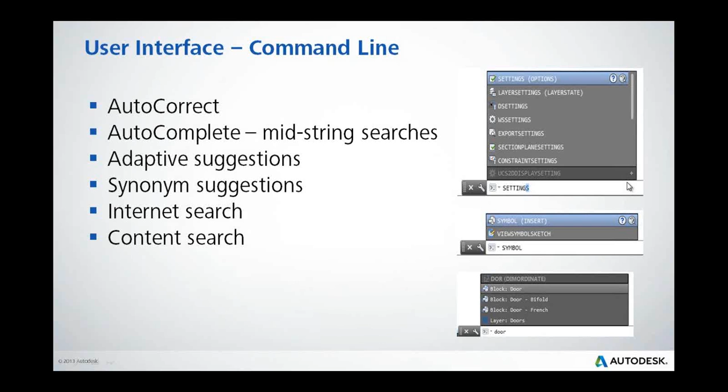And there's one more page here, because there are so many new features inside of the command line. Let's take a look at a couple more.

You have complete control over how this is set up. So if you don't like some of these new additions, turn them off—it's not a problem. You can set it up to work exactly the way you want to work. As I mentioned earlier, you can control that synonym list and add or subtract any synonyms, or modify them. You can also modify the autocorrect capability. It's so great that AutoCAD is so customizable. I love that—you can set it up to work the way you like to work.

All right, enough PowerPoint. Let's dive into AutoCAD 2014.

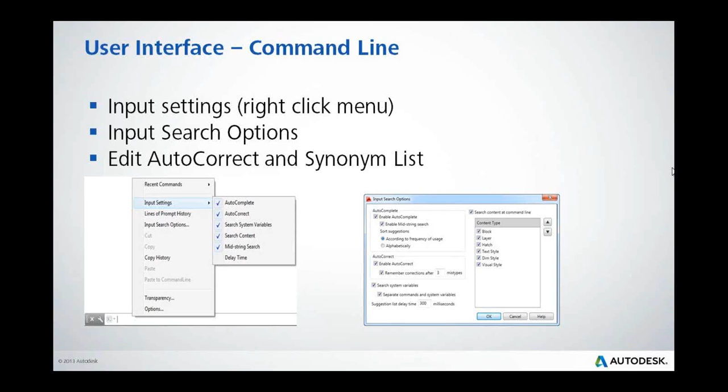All right, so here we are inside of AutoCAD 2014. For those of you who haven't upgraded yet, this is what it looks like—not a huge difference from 2013. A couple of changes you're going to see. We're going to talk about these tabs here, for example. We'll get to those later.

Right now we're focusing, of course, on the command line, right? So let's take a look at some of those things that I talked about.

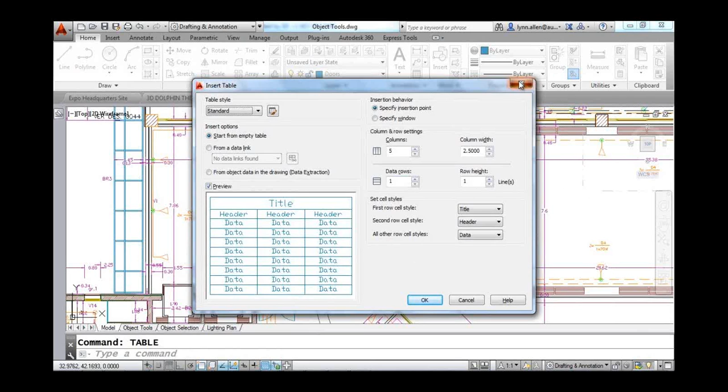I'm going to come over here and say—oh, spelled line wrong—and look, it was smart enough to execute the line command. Or how about if I spelled table wrong? It's smart enough to execute the table command spelled correctly, right? Nice, because let's face it, us CAD operators are not known for our amazing abilities to spell, correct?

So, nice new feature. I also mentioned that AutoCAD supports mid-string search now as far as the command line is concerned. Let me show you what I'm talking about. I'm going to type in settings, and you'll see that it executes all of these different system variables that have to do with settings, right? Quite a few. So settings is at the end of most of those, but it's able to find them for me.

This is great because I can never remember which settings I'm after. It has the word settings in it, but I don't know—is it D-settings? Is it B-settings? So that's also quite nice. And even if it was in the middle of a word, it would find it as well.

I also mentioned that AutoCAD 2014 can search for content. For example, if I type in the word door, you'll see that it tried to figure out if I was spelling something not quite right—that would be that option there. But you'll also see that it allows me to insert a block of a door.

Or check this out—I can click on layer, and it actually sets it to be the current layer. Love that, that's pretty cool. This is for those of you who are so into your command line that you really like to type. You know who you are.

All right, another new feature for the command line is the ability to search for synonyms. For example, if I type in symbol, you'll see that it's happy to execute the insert command, because in MicroStation, the symbol command is equivalent to our insert command. Or if I type in zip, because a lot of us think of zipping up files, you'll see that it will execute the eTransmit command for you.

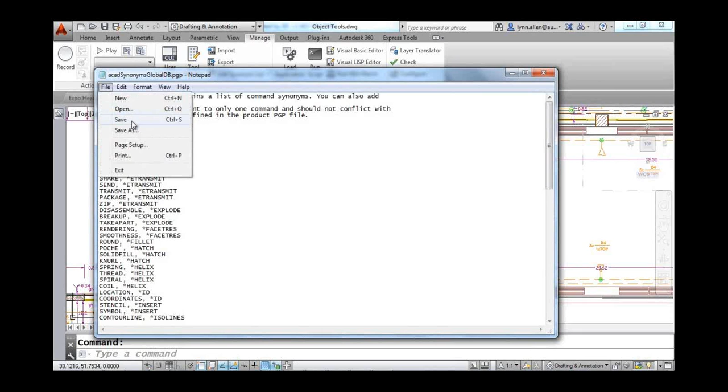So there is no save on here. It's kind of unusual, there's no save. This is just Notepad. You can do file and save, or if you go to exit, it's actually going to give you the same option. So save, it's up to you, however you want to do it.

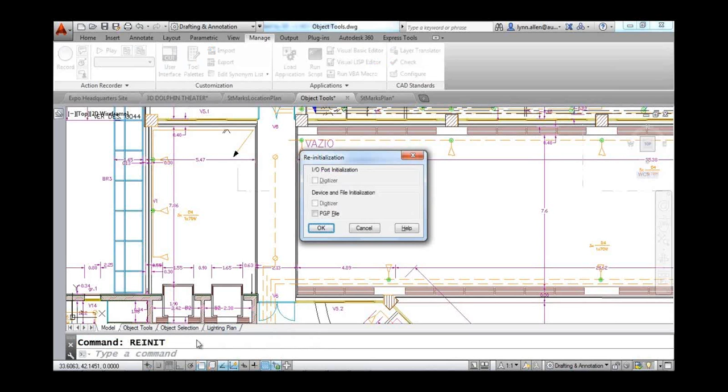Now, type in Dunkin' right now. It's going to have no idea what I'm talking about because the PGP file doesn't take effect until you leave AutoCAD and come back in, which I'm totally not going to do. That'll take too much time. There is a sneaky command that allows you to get around that called reinit. I'm going to execute the reinit command. That's for reinitialize. You don't need to remember this. In most cases, you can just leave AutoCAD and come back, like I said.

You'll see there's an option right here for the PGP file. So I'm going to go ahead and click on that and say OK. Now, if I type in Dunkin', D-U-N-K-I-N, it executes the donut command. Yay! All right, so what else can I do? Set that up anywhere you want. Have fun with your coworkers, right? You can completely change all the commands inside of AutoCAD.

Kind of fun though. Also, just to show you a couple of other things, if you go to settings, you'll see that you have the ability to control any of these. If you don't like them, you can turn them off. A simple click will turn them off. I can't stand that mid-string search, by all means you can turn it off. There is also a dialog box, input search options. It has all kinds of ways that you can customize the way this works for your command line.

So when I did a content type, remember I typed in the word door, it found a block called door that had the word door in it, and it found a layer that had the word door in it. Could have also found a hatch pattern. Why you would have a door hatch pattern, I can't imagine. But you'll see these are all the things it searches for: hatches, text styles, dimension styles, and visual styles. Maybe you want to control this—you only want it to search for blocks and layers. You can certainly turn this off, it's completely up to you. You'll see once again you can turn off that mid-string search. There are a variety of things that you could do, right? Set this up exactly the way you want it to work.

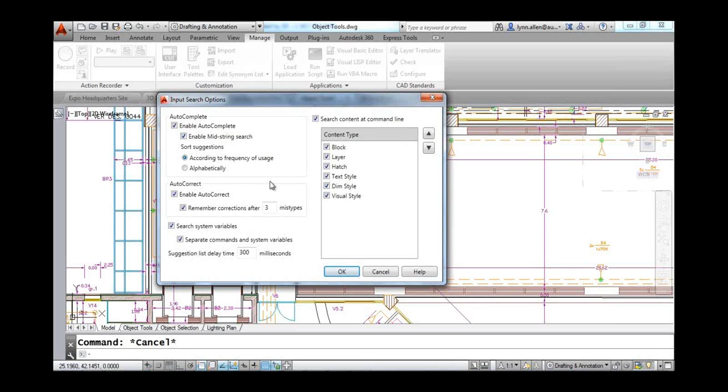Great, one last thing that I haven't shown you yet. If I type in set, you will see there's all kinds of commands that have set in them. And then you'll see when you get down there, this is actually a system variable. There are all kinds of system variables that have the word set in them. Rather than show them all to you and overwhelm you and scare you, there's a plus at the end. You can click on that plus, and it will show you all of the system variables that have the word set somewhere in it. So if you don't see a system variable that isn't showing up, it's probably because you need to expand the category. And that's just AutoCAD's way of not overwhelming you with too many options.

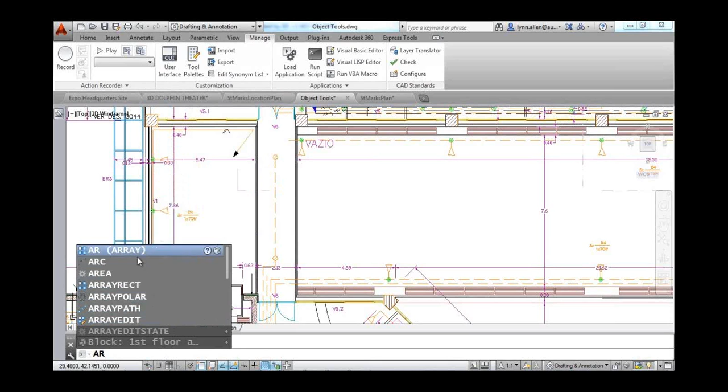All right, so one last thing. If I type in AR, you will see that I get a list with array at the top, arc, and area. So this list is controlled by your frequency. The more I use the arc command, the more likely it's going to move to the top of the list. If I use the area command all the time, it might move to the top of the list. So my listing is probably different than your listing. Could be, maybe it's not, maybe it's if we use them in the exact same order. Just realize that as you continue to use AutoCAD, that command line is going to get smarter and smarter, and it's going to allow you to get to your commands faster, which I love.

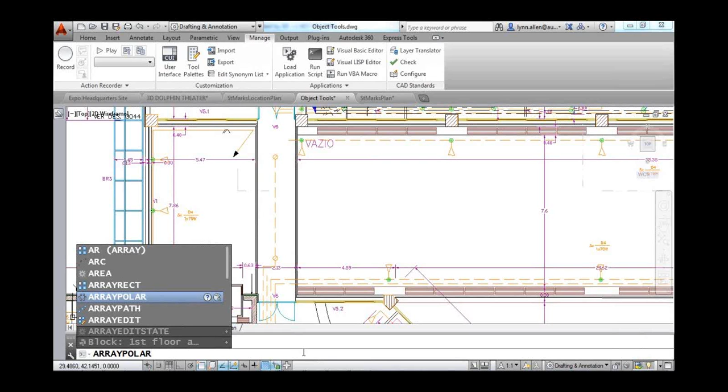All right, so let's go back over to the PowerPoint now that we are command line experts.

Let's take a look at one of my favorite new features inside of AutoCAD 2014, just because it's so logical. How has this not been in here before, right? Now we finally have file tabs of all of your open drawings right there inside of the drawing editor.

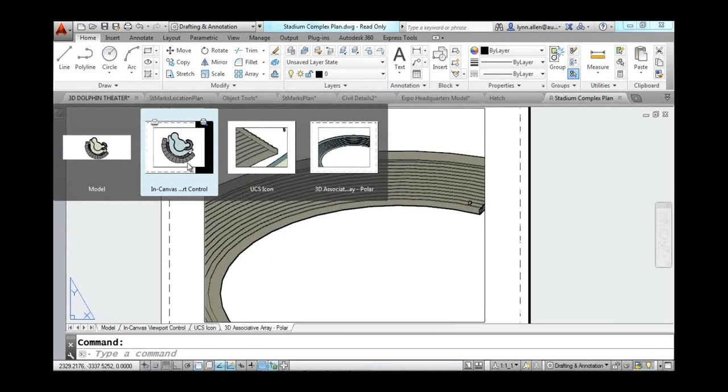Let's take a look at how these file tabs work. Back over to AutoCAD, if you take a look at the drawing editor, you'll see that all of the open drawings are now displayed in file tab format. I love this. Notice as I move my cursor over the open drawing files, it shows you the layout tabs that exist inside that particular drawing file. If I move my cursor over a layout tab, it will automatically change the background to give you the appropriate layout tab preview.

It doesn't actually move me to it at that point, I'd have to click on it, but it gives me a nice preview. You'll also see inside each of the layout tabs you have the option to do a plot or a publish. Love that, without having to actually go to that layout tab.

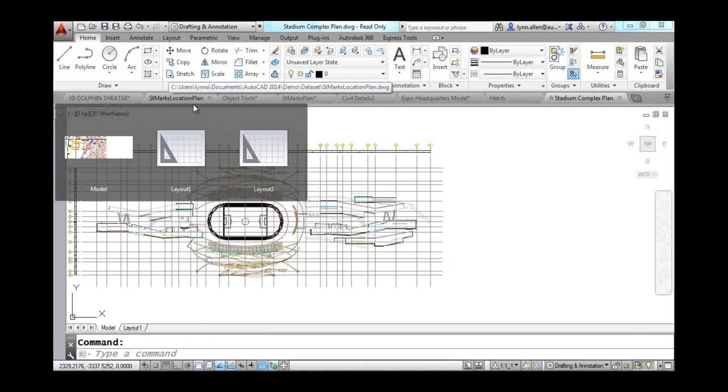As I move my cursor across here, it shows you the different open drawing files and the layout tabs in each one of them. Very powerful. Now, if you get so many drawing files open that they don't all fit, don't worry. You go to the very end down here, you'll see a couple of arrows. Click on there and that will also show you all of the open drawing files, so you can easily get to the one you're after.

Some of these drawing files you'll notice have a lock on here, you can see the lock down here too. That means that file is read-only, so you can't save it, make changes and save it. Some of these you'll see have asterisks after them, meaning they've been edited and need to be saved. Just some more information for you.

I actually love this right-click option because there are some very cool things if you right-click on any of the tabs. These are basic, new, open, save, blah blah blah, but I really like this 'close all except this tab'. Super handy. You don't even have to be in the drawing file, you can just right-click on the drawing file you want to leave open, and everything else will be closed down. Pretty cool, very fast and efficient.

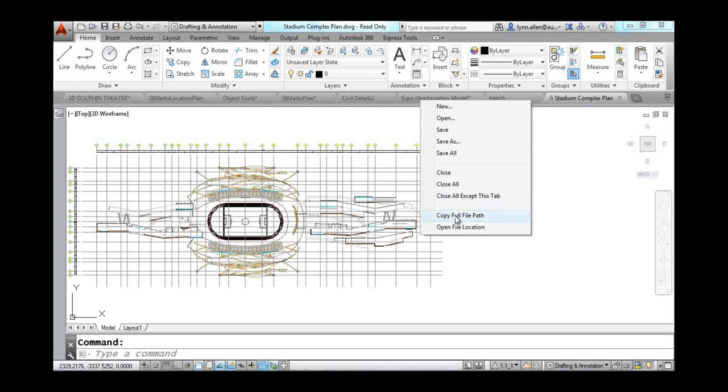Copy full file path. Let's say you wanted to send a link to this drawing file to somebody else so they could grab it from a directory somewhere. You could copy that to the clipboard. And open file location, I'm totally going to click on that just because I'm always wondering what directory a drawing file is in, since I'm not organized. I hope you are more organized than me. I actually love this option because I can quickly go see what directory that drawing file was in. It's better than going to properties or doing a save as. We all have our different tricks of figuring that out, but I do like that feature.

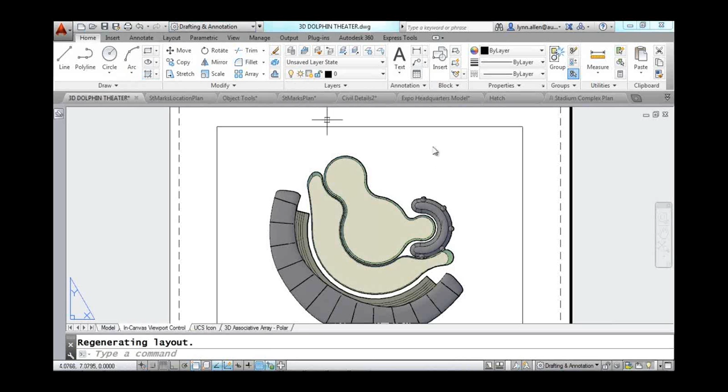All right, let's go back to where we were inside of AutoCAD. One more thing: let's say you want to create a new drawing file. You can come up here and click New, or go into the application and click New, but you can also click on this little plus right here, and this will create a new drawing file for you. If you have a default template set, it's just going to use that and run with it—it's actually executing the QNew command. But if you don't have a default template file set, it will ask you to select a template file before it creates a new one.

All right, so let's say for some reason unknown to man, you don't like these file tabs.

Why? I don't know, because I love them. You can turn them off.

Simply go to View, and you'll see an option there for File tabs, and they go away. Oh, sadness, and put it back. But just so you know, we try to make it so that if there's a new feature you don't like, you don't have to be forced to use it in most cases. Not all cases, but in most cases. All right, those are File tabs. They are awesome, they rock, and you should try them.

Back over to our PowerPoint. So I think these next few features I'm not going to show you. I think you guys are smart, you're going to completely understand what I'm talking about.

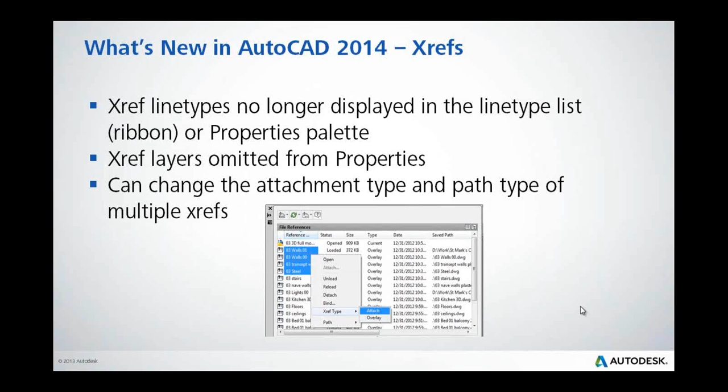All right, so let's move on. I don't know how many of you work with reality capture or if any of you work with point clouds and scanners, but you will find that all of the Autodesk products, I mean like AutoCAD, Revit, and Inventor, all come with this great new program called Recap.

It is focused around reality capture, and it is a totally separate application. It comes free along with the suite, so you're going to get it whether you like it or not. But it's a very, very powerful application.

If you're familiar with point clouds at all, you know that point clouds are big, slow, cumbersome files. You want to slow down your AutoCAD, put a point cloud in it. You get paid by the hour, put lots of point clouds in it. So it really slows down your ability to draw and edit inside of AutoCAD. So Recap gets there first. You're going to use Recap to put all of your point clouds in it, and it's going to speed them all up, make them lightning fast, so that when you take them into AutoCAD or Revit, for example, those point clouds are going to be fast and mighty.

All right, it's a really interesting program. Once again, it comes free of charge. Definitely suggest that you take advantage of it if you are into reality capture. And you don't have to have a gazillion-dollar scanner to use Recap. You can actually just use your phone, or if you want to get fancy, you can use a really nice camera. But I'll show you some examples of this, all right?

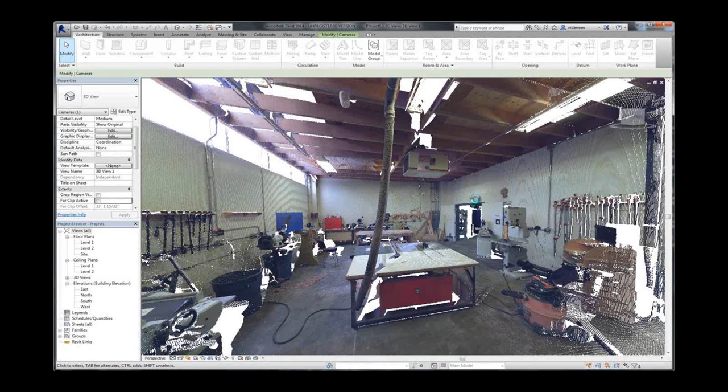And this is a point cloud file. It looks almost like the real thing, doesn't it? I'm going to go ahead and click on here. We'll see how good the experience is for you. I'm doing a video inside of a video, but you can see this is a pretty impressive point cloud. These point clouds were run through Recap to make them faster, and they were brought, in this case, into Revit, but you could also bring them into AutoCAD.

So just to kind of recap there, with CAD we usually start with a blank sheet of paper, right, which is not realistic. Everything that we work with, for the most part, has an existing environment. So reality capture allows you to take it to the next level and design in context, which is just so much more efficient.

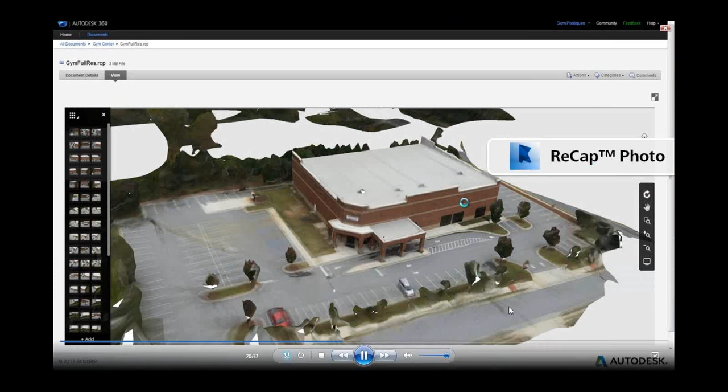So here's an example of ReCap Photo, which is another application that you have access to free of charge. Let me go ahead and click on here. ReCap Photo does exactly that. It works with just a regular camera. Technically, it could be your cell phone.

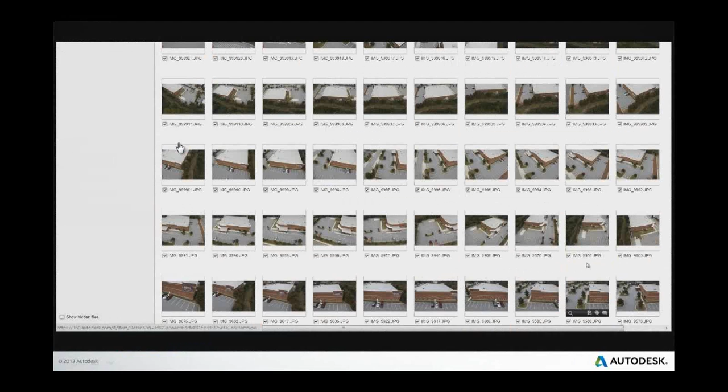You have a little drone here or there that flew over the building. You probably don't have one of those laying around, but I bet you wish you did. You want to fly over the building so you get the roof, right? So you could also rent a helicopter, stand on a really tall mountain. But you do usually want to try to get the roof if you can. You don't have to. So those were all the pictures that were taken from the camera.

And then ReCap Photo is going to put them all together and create a 3D model out of it. Look at that, that's amazing. Once again, extremely realistic. You can tell, look at that. It looks like you're right there with the sign.

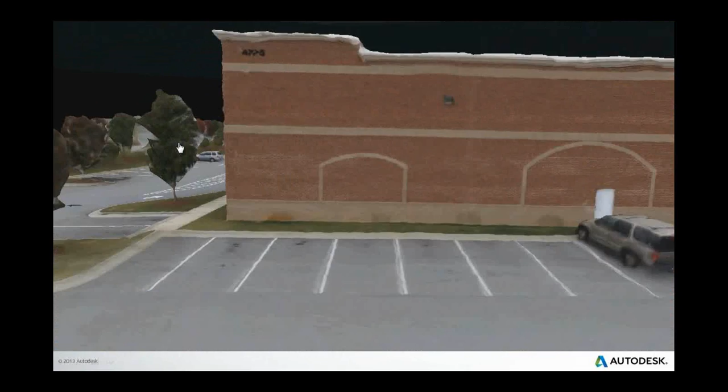Now the goal is to add in a second floor using the existing building, which makes complete sense. This is incredibly accurate. Point clouds are very precise. They're basically just XYZ coordinates stored together in a big cloud, kind of like a bunch of mosquitoes.

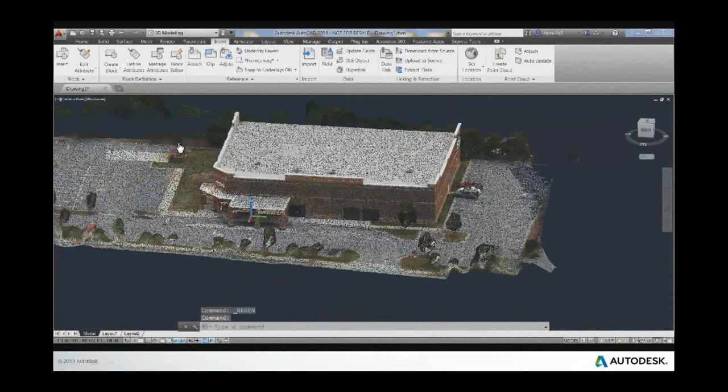So we're going to go into AutoCAD and trace right on top of the point cloud. Once again, in 2013 or before, this would have been very slow and very cumbersome. It's very easy now. Speedy.

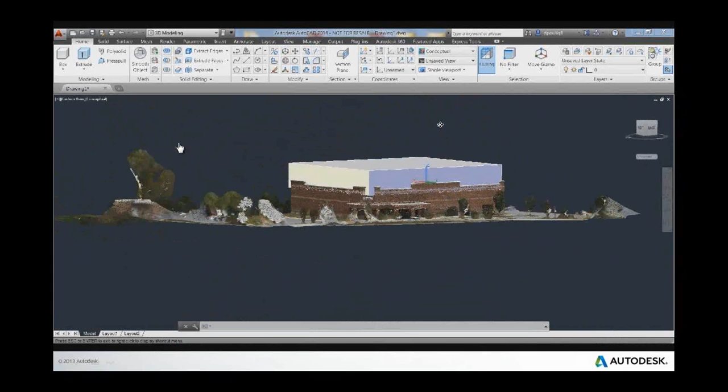You can turn off this point cloud environment at any time if it gets in your way, once you have the points that you need. There you go. Just that simple, easy peasy. Definitely give it a try if you have it—might as well, right?

Now we're going to move on to Geographic Location. Geographic Location has been in AutoCAD for a while, but it's been greatly improved inside AutoCAD 2014, including support for Bing Maps, which is fantastic.

This gives you the Geographic Location feature, which for those who haven't worked with it before, gives you the opportunity to work with your design in context of the actual location. You can pull up an aerial view or a road view and include it in your design. Very, very helpful. It also comes in handy for rendering because you can set an actual sun angle based on where you are anywhere on planet Earth.

It's very, very helpful. And for those of you who work with AutoCAD Map 3D, you'll see it has the same coordinate system library, with many options when it comes to selecting the proper coordinate system. Okay, let's see it in action.

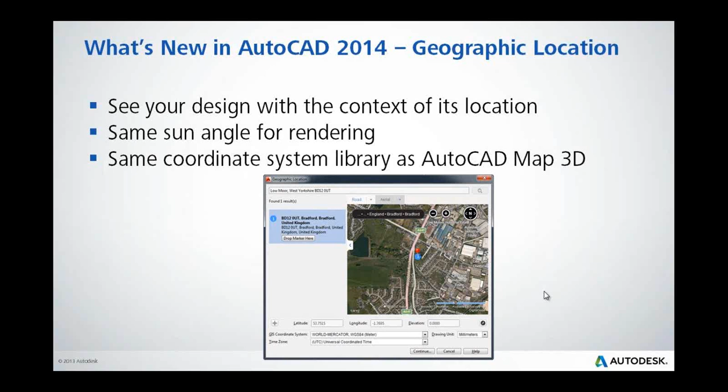So here we are inside AutoCAD 2014, and this is an interesting floor plan. A colleague of ours purchased a church in the UK and wants to live in it. He designed this floor plan, and what we'd like to do is place it in the actual location on the map to see if the design makes sense and give it better perspective. It'd be pretty awesome to live in a nice big church, right?

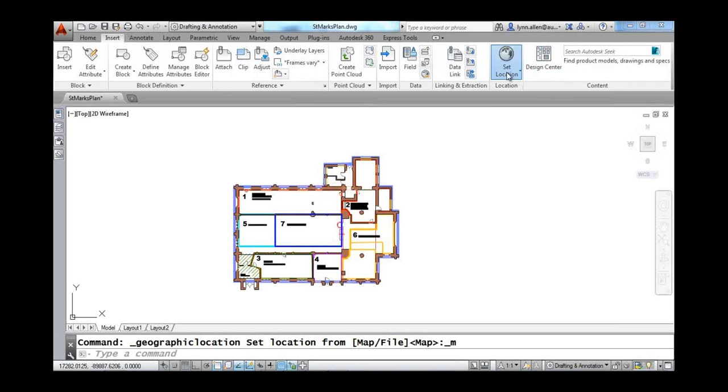So we're going to go to the Insert tab on the ribbon and go to Set Location, and I'm going to grab it from a map, from Live Maps, which is courtesy of Bing. Now, let me give you a heads up: if you are not logged into your Autodesk 360 account, this will not happen. Make sure you log in first.

So I'm going to type in an address—let's start with a more generic one. Let's do Bradford, UK. You'll see it comes up with 3 different locations for Bradford. I can click down this list and it will show me the 3 different locations. You can also see I happen to have it set to automatic. If you wanted, you could view it from a bird's eye view, or switch it to plain old aerial photographs—whatever you want.

Now, we're not actually going to Bradford—that's not where the church is. The church is actually in Low Moor, UK, and it has only one address, which is why that wasn't as exciting. I wanted to show you a different one first. You can see right there, if that's the right location, you can say drop the marker here.

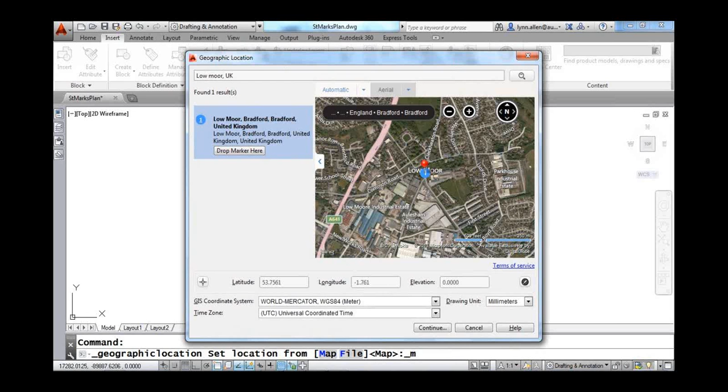So Low Moor is kind of generic. In reality, the church is right down here, so my goal is to move that marker so it's actually closer to the church. Let's collapse that, and I'm going to grab that pin and move it down here. Let's see how good a shot I am today.

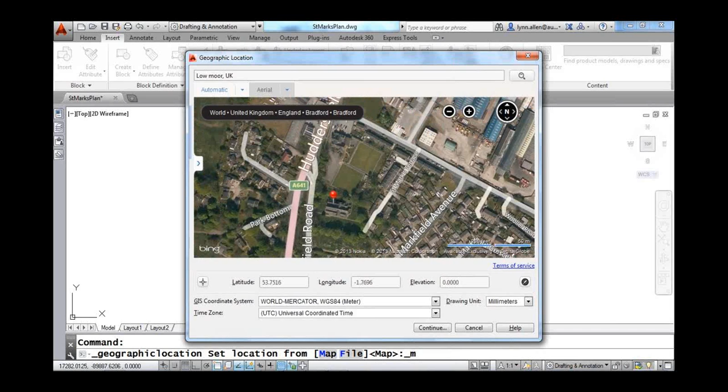I'm going to zoom in because I'm not convinced. One more—zoom in a little bit more. I want to get right on the corner of that building. So I'm going to grab that pin and put it right on the corner. That looks pretty good, because we need to line it up in our drawing file.

You don't want to just randomly drop a pin—you want it to be in the right location. That makes sense, right? So taking a look at this, you'll see the latitude and longitude of where that pin is.

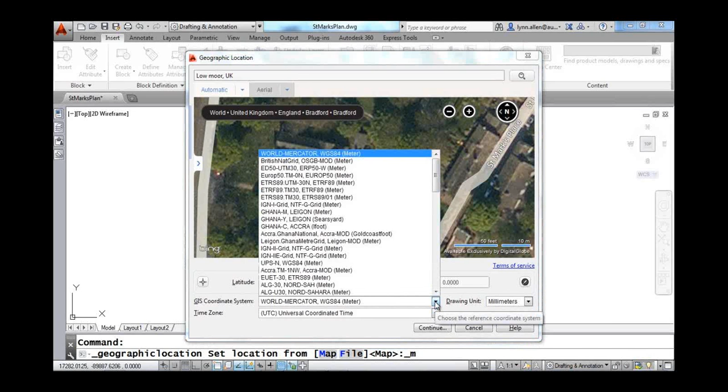You can do that manually as well if you prefer. I want you to also notice that the coordinate system is World Mercator. That's a very generic coordinate system and probably not going to do the job for you. As soon as you drop that pin, it's going to give you coordinate systems that are relative to the area that you're in, so you're going to pick one that's better.

In this case, I'm going to switch over to the British Nat Grid. That's a much better coordinate system for what we're doing to make sure that we get the best results. Now, that automatically scales the drawing based on that coordinate system. You'll also see that the drawing units are optional as well, but I like to leave it the way it was set up to begin with, though you can make changes to it if you want to.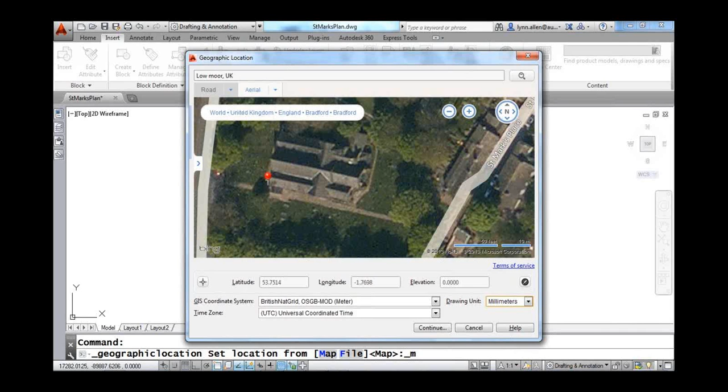So what else can I do? I can switch over to road if I want to get some idea what this looks like from a road standpoint. Completely up to you. Or, you know what else we can do? We can do bird's eye view, right? It's another option, gives you a little clearer picture of that church. I like to switch it to automatic so that if it's zoomed out, it's going to give you the road map, and if you're zoomed in, you're going to get an actual aerial photograph.

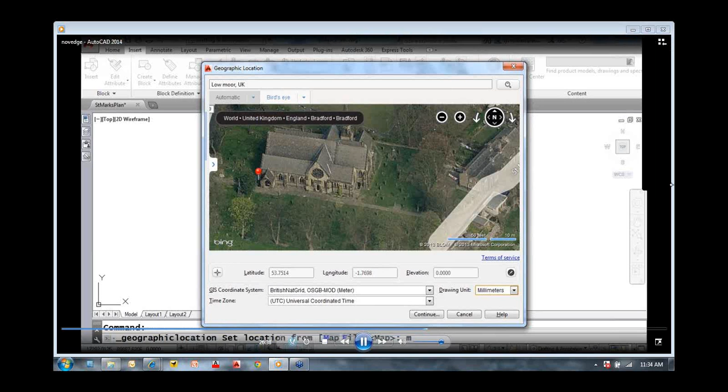So I think that's it. We're inside of the geographic location dialog box. Let's go ahead and hit continue. And now, you saw where I dropped the pin in the map. We need to click on here where we want that pin to match up with. So I'm going to grab the lower left-hand corner, and I'm going to grab the upper left-hand corner for north. It wants to know where is your north, right?

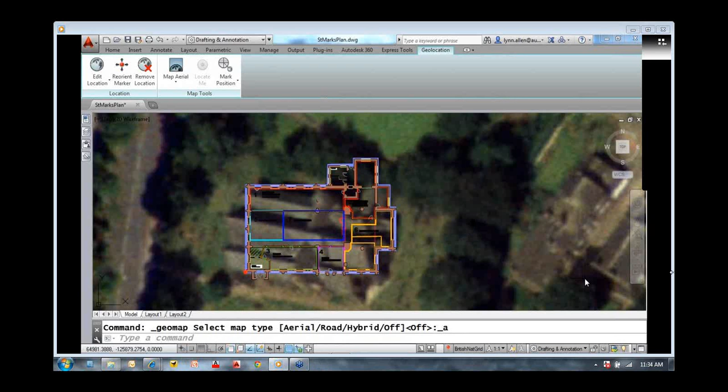Now, I currently have maps off. I want you to see it added a geolocation tab on the ribbon. I'm going to turn those maps on. Let's see how we did. Well, we're kind of close. It's not quite the right angle. It looks like I could use a little reorientation. But before I do that, let's come down over here and show you what Map Road looks like.

You can even do a hybrid, right? So let's reorient that marker. Let's get it a little bit better. We want the same point, but I want to pull it off just a little bit so I can angle it just a little bit more. Let's turn that map back on. Let's see how we did. Yeah, it's close. You can see I'm still a little bit off. I'd have to do a little bit more work to get that correct, but I think you get the general idea.

So there are a variety of things you can do. You can edit the location. That takes you back into the map, reorient the marker. I probably would need to go back into the map to easily fix this, get it just right. You saw the different options that I had up here for the way I wanted it to display. The map gets in your way, just turn it off, no problem. And as well as that, you can change the marker position. So pretty cool technology, don't you think? That is geographic location. I want you to give it a try.

I happen to know the first thing that you're all going to do is you're going to key in your address. At least that's the first thing I did. So, all right, back over to the PowerPoint.

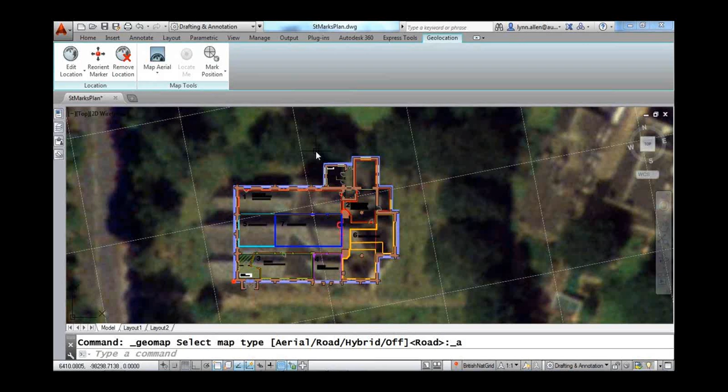The next set of commands has to do with improvements to what I refer to as everyday AutoCAD commands, those commands that we use all the time. And I love these improvements because if you can remove a click or a pick from something that I do all day long, well, that is a beautiful thing. Am I right? That is why I like these so much. Get rid of the tedium. There's quite a bit of tedium in AutoCAD, and we want as little of it as possible.

So I'm going to just talk about these. Once again, I'm not going to show them to you because these are commands you're familiar with. So the first one, very simple: we've all run into that situation where we wanted to draw an arc clockwise, and as you know, AutoCAD much prefers to draw arcs counterclockwise. So if you run into the situation where it's not going in the right direction, no problem.

Hold down the Control key, and you'll have the right arc that you want in no time at all. A simple change can make a big difference for those of you who draw a lot of arcs.

If you've ever tried to fillet a polyline with itself, you know that AutoCAD yells at you - you can't do that, warning, warning. So now you'll find that the fillet command is much more easy going, and it will allow you to fillet a polyline with itself.

For those of you who are really into sheet sets, you'll notice that by default, the Create Date field always reflected the template file, which is not what you want. The Create Date field should reflect the new drawing sheet that you've added, right? So just so you know, that's been changed as well.

For those of you who work with blocks with attributes, which is almost all of you, you know that by default, AutoCAD does not display a dialog box for the attributes. They show up on the command line - very archaic. So now, by default, the attribute dialog box will show up. That's the same as setting ATTDIA to 1. So that was a great improvement.

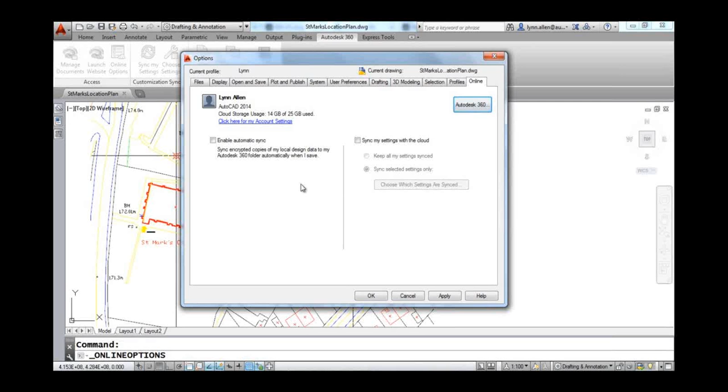I also mentioned that you have the ability to sync your settings to your Autodesk 360 account. I talked quite a bit about this last year. You can save your options, your customization files, your tool palettes, templates, etc. up into your Autodesk 360 account. That really comes in handy if you decide to use AutoCAD on a different system, so you can quickly set it up the way you like to work. Or let's say things go terribly badly and you have to reload AutoCAD. As long as you have your settings saved, you can pull them down and get back up and running in your nice, comfortable environment very quickly.

So here you can share a document. You can send an email to somebody and it will set up a link directly to your drawing file. You can collaborate now, which takes you to AutoCAD WS, which as of yesterday, Tuesday, is now called AutoCAD 360, and Design Feed, which is another new feature inside of AutoCAD 2014 that I mentioned earlier.

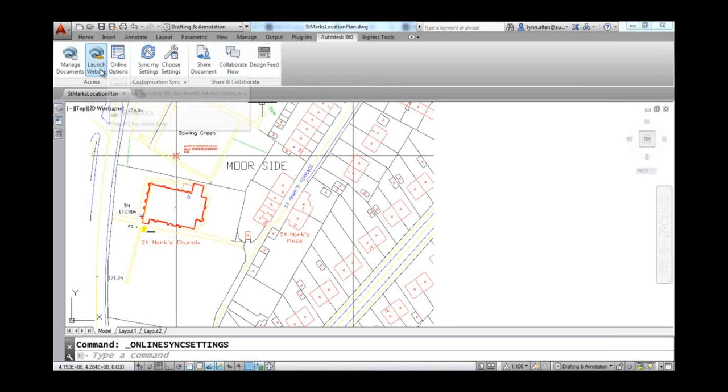All right, so let's launch the website. This is going to take me into my Autodesk 360 account. You can see what's been going on today. Looks like I was working with a couple different files today. I like to go to the Documents tab.

And here you'll see all the documents that I have loaded up on my Autodesk 360 account, and many of them are in folders. Most of them are DWG files, but they could be Revit files or Inventor files. It could be a grocery list. They could be PDF files. They could be anything that you want. It's your Autodesk 360 account, and you get to pick what you want to put into that account.

Now, in the lower left-hand corner, I always keep an eye on this. This shows you how much of your 25 gigabytes, if you're on subscription, or 3 gigabytes, that you have currently used. So keep an eye on that, and make sure you don't get too close to your allocated limit.

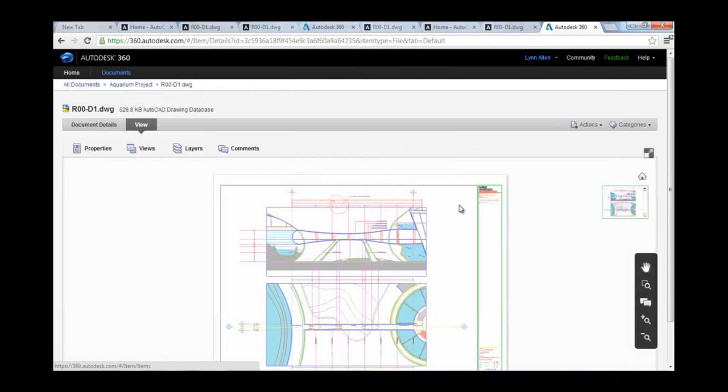So I'm going to go into a folder. Let's go into this one. You'll see I have two drawing files in this folder, and let's go into this file. So let me show you what you can do inside of your Autodesk 360 account. Here's my drawing file, and you'll see, of course, I can zoom and pan.

That's no big surprise. You can control layers. You can turn layers off. As I go through here, you should see some layers being turned off.

You can add comments in. You can see that I added a comment earlier: this is my updated file, have a nice day. I'm very friendly, but you could add, thank you, Novedge, for sponsoring this webcast. You'll see that that's another option on there.

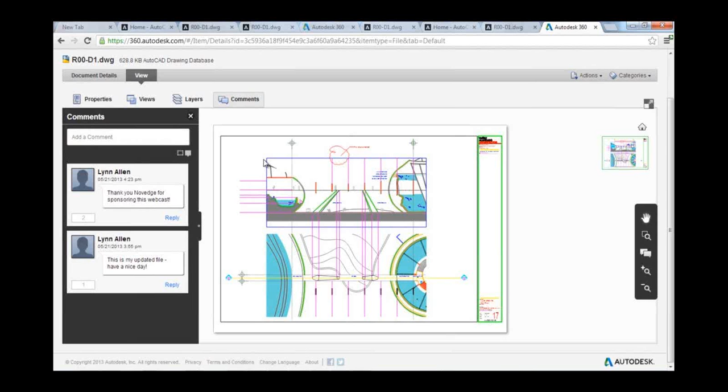You can't really edit inside of Autodesk 360. If you want to edit, you're going to need to go to AutoCAD 360, and that, as I mentioned, was just announced as the name change. And there you'll find that you can do some basic editing of any drawing file.

You'll see that you can share this drawing file with people. You can upload new versions. There's all kinds of things that you can do here inside of your Autodesk 360 account. Once again, if you want to edit, you're going to have to go to AutoCAD 360, also free, which is good.

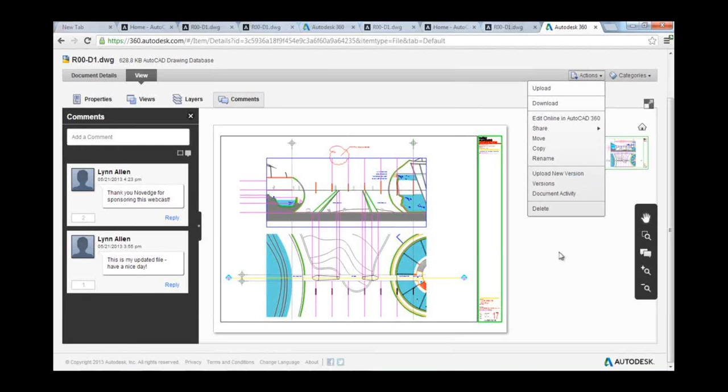Another new feature inside of AutoCAD 2014 is Design Feed. And Design Feed, as I mentioned before, allows you to post comments, questions, and suggestions for your drawings that you can then share online through Autodesk 360. It definitely allows you to take collaboration to the next level.

Let's take a look. I should mention that I'm going to be showing you Design Feed over a video, an existing video, because Design Feed requires two-way communication, which is really hard to do by yourself. So I'm going to be talking over a video. You'll see that Design Feed shows up on the left-hand side of the screen as a palette, along with all of the great tools that you have as part of Design Feed. I also showed you earlier that you turn on Design Feed from the Autodesk 360 ribbon tab.

Now, if you haven't already saved your drawing to Autodesk 360, it's going to let you know, because all of the tools will be grayed out. But once you've saved it, you can enter text to create a new post, and it will appear in the Design Feed whenever anybody views this drawing.

Your colleagues and anyone else with access to the drawing can view and respond to your posts when they open it. You can also tag specific people so they receive an email notification with a link to your drawing.

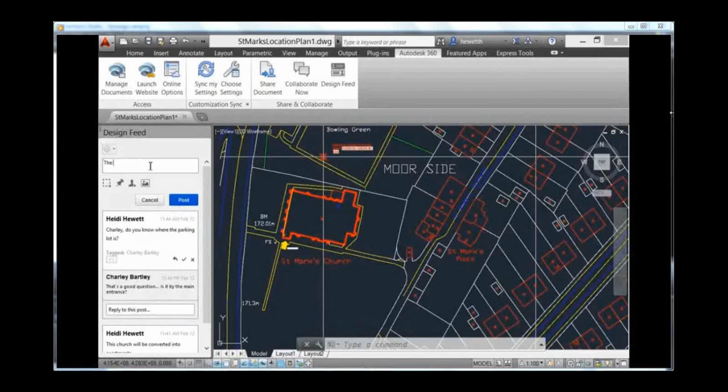When somebody replies to your post, the Design Feed immediately updates to display their response. You can associate a post with specific points in the drawing. A bubble in the drawing indicates the post number. If you select the bubble, AutoCAD zooms to that location, expands the bubble to display the corresponding post, and highlights it within the Design Feed palette.

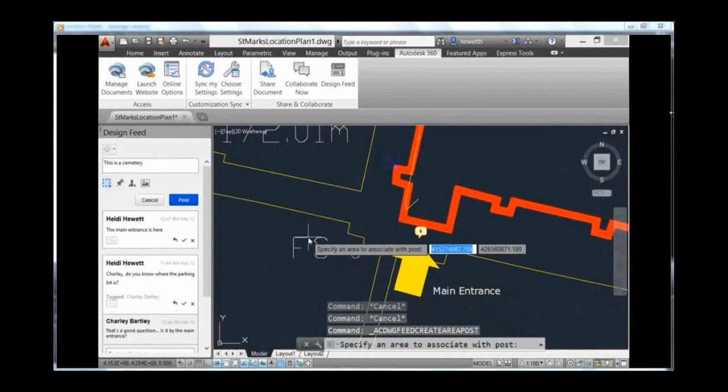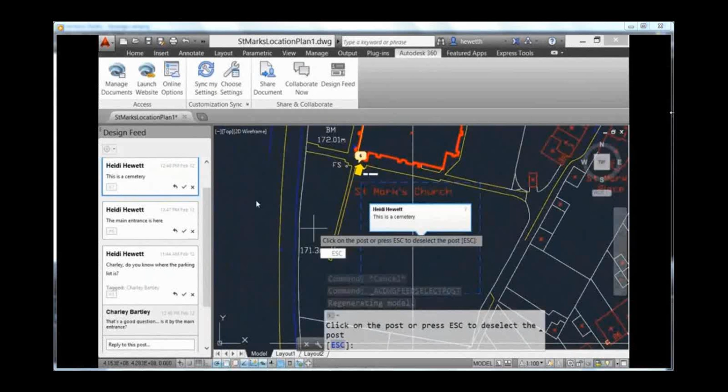You'll find similar behavior if you associate your post with an area in the drawing rather than a specific point. After specifying two points to define a rectangular area, a bubble with the corresponding post number is displayed. If you select the bubble, AutoCAD zooms to the area, displays its boundary and associated post, and highlights that post in the design feed.

Similarly, when you select a post in the design feed that is associated with a point or an area, AutoCAD zooms to that part of the drawing and displays the corresponding information in the drawing window.

You may also want to add images. It supports all the common image formats such as JPEGs and bitmaps, and the images are displayed along with the post right there in the design feed to help clarify questions and any information about the design.

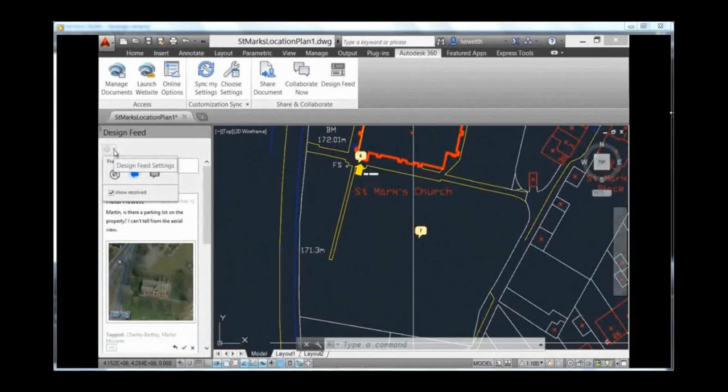Very handy. When posts in the design feed are no longer active, you can mark them as resolved. A control in the design feed settings enables you to hide all those resolved posts so you can focus on the open issues.

So give design feed a try. I think you'll wonder how you ever collaborated without it. I know it has quite a few fans out there.

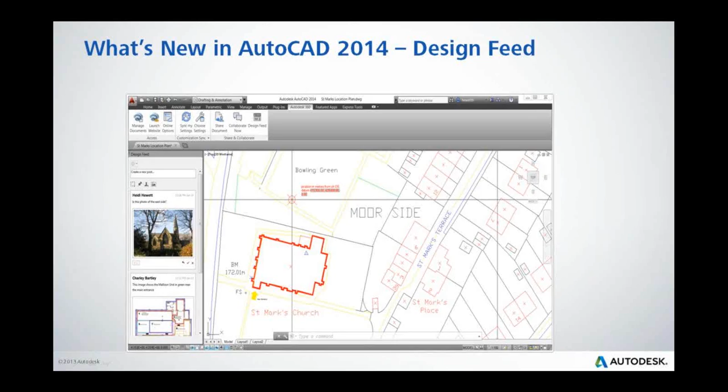So we're going to wrap it up here. You should know that AutoCAD 2014 supports Windows XP, Windows 7, and Windows 8. So you should be able to get that smoother pan and zoom that you'd expect from Windows 8.

This webcast is really about the AutoCAD Design Suite. I can't emphasize enough how important it is that when you go to upgrade or buy AutoCAD, you take a look at the Design Suite, because you get all of these tools built right in. It's easy to install — a one-click process — and we also make it easy for you to go from one product to another, right inside the product.

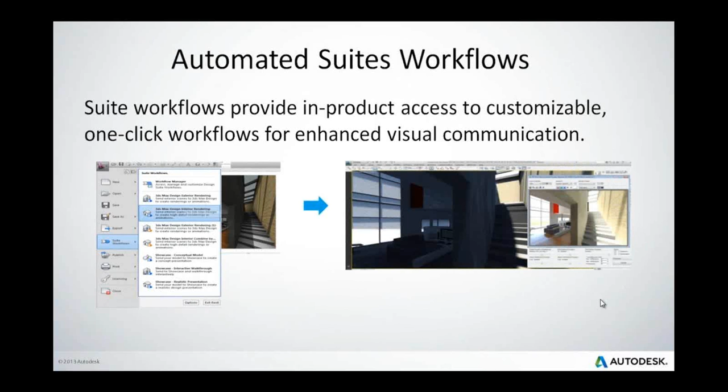For example, if I'm inside AutoCAD and I want to take it into Showcase or 3ds Max Design, it's very easy to do that with these one-click workflows. The other products that come with the Design Suite are very valuable, so I'm going to run through them one at a time quickly, hoping at least one will grab you. It's such a great value in purchasing the AutoCAD Design Suite.

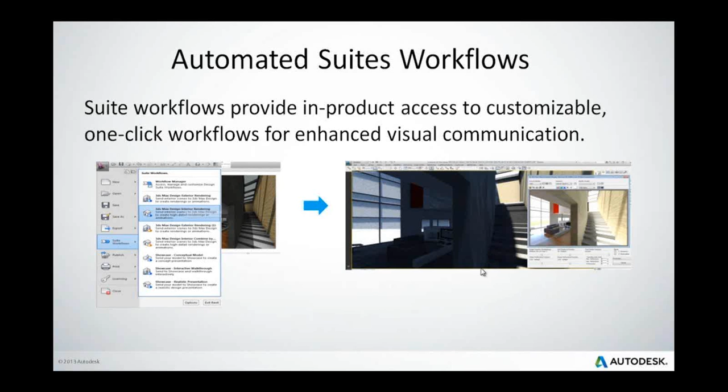So first off, we have Sketchbook Designer. AutoCAD isn't really good at that whole conceptual design thing — it's just a little too complicated, especially when you want to draw on a napkin and be free form.

Sketchbook Designer makes it very easy for you to do exactly that, and you can take those designs right into AutoCAD if you want. It's also used a lot for illustration purposes. It's a very simple, easy-to-use program that's very powerful for conceptual design and illustration. You might be familiar with its very popular brother, Sketchbook Pro, that even my son has on his iPad — a very powerful, creative tool.

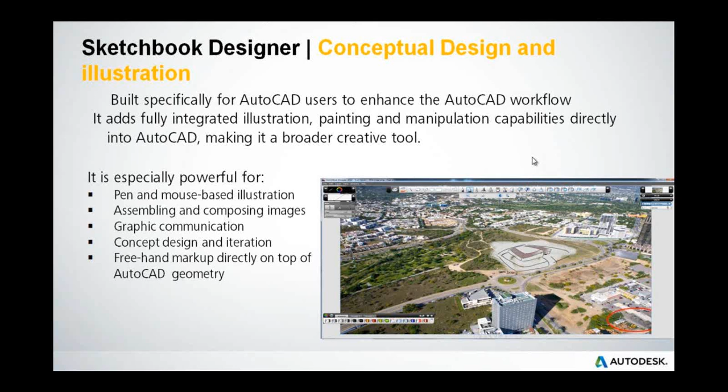And AutoCAD Raster Design.

So this is probably one of my favorite products that's part of the AutoCAD Design Suite. We all have drawings laying around that were either drawn by hand in older drawings, or maybe done in the early CAD days, and we don't have access to the digital data. AutoCAD Raster Design allows you to scan in drawings and convert them to vector very easily. It's smart. It can convert objects to polylines, convert text to real-life text inside of AutoCAD, despeckle and get rid of dust marks and coffee stains, and even sort it out so that it's going at the right angle. So a very, very powerful tool is Raster Design.

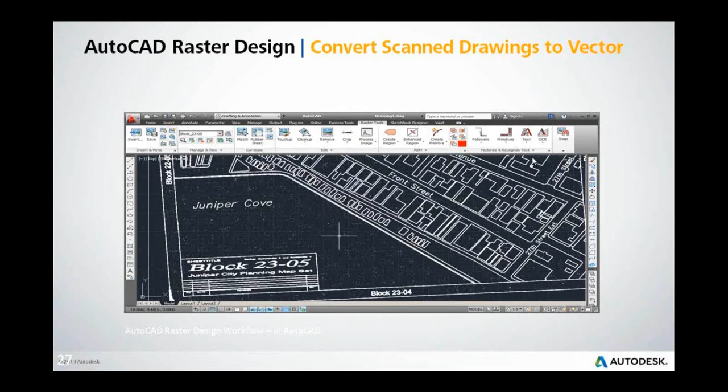Autodesk Showcase. I love this product too. This is for those of you who aren't pros at doing awesome visualizations and renderings. Autodesk Showcase makes it really easy for you to do that. All you have to do is take your 3D models from inside of AutoCAD into Autodesk Showcase. It has a whole bunch of friendly and easy to use templates that allow you to really jazz your drawings up very quickly. And it's a zero-wait rendering process. You can sit down with your client and make changes in materials just like that, very quickly. You can save those changes, publish them to HTML. It's just a very, very powerful program, Autodesk Showcase.

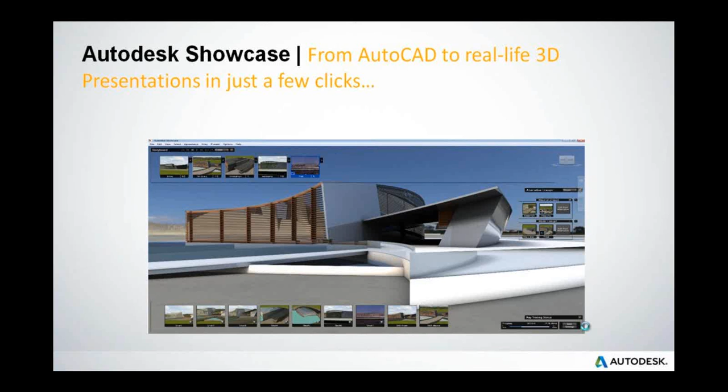And then 3ds Max Design, well that's the cream of the crop, isn't it? Maybe not quite as easy as Showcase, but extremely powerful. You can make visuals and animations that look just like the real thing. In many cases you can't tell the difference between it and a photograph. Very, very powerful. This is for those of you who are serious about your visualizations. That's in the AutoCAD Design Suite Premium, so you pay a little bit more for that. But if you're going to get into high-end, high-impact visuals, definitely take a look at 3ds Max Design.